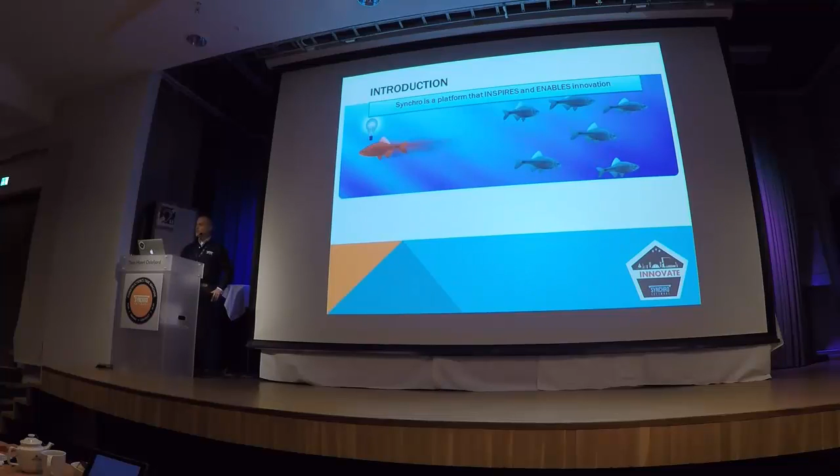And this whole background of VDC is really a core of what I'm going to talk about. When we get to innovation, Synchro inspires innovation, but more often than not, somebody needs to show how it's done. And that's just the nature of introducing something new.

So back in 2014, we essentially asked ourselves, why don't we do this ourselves? It seems like kind of an obvious thing that a software company should help customers implement the software, enable innovation. But I would argue that our company is unique, and that there literally is not another software company that does it the way we do it, to the degree of commitment that we have in extending the value of our software in the hands of our customers in the most powerful way possible.

So the question is, how do you build the capability once you decide you're going to do this? It really comes down to two essential steps. One is develop a VDC-based strategy. That's the core foundation of how you're going to go about doing what you do. And hire people who are not only experts in Synchro, but who understand what VDC is all about.

When you think about it, the earlier presentation talked on these topics, but I would venture to say that a lot of people that think about BIM, think about VDC, don't really appreciate the connection to 4D as thoroughly as they should. 4D is all about the virtualization of the process from design to construction.

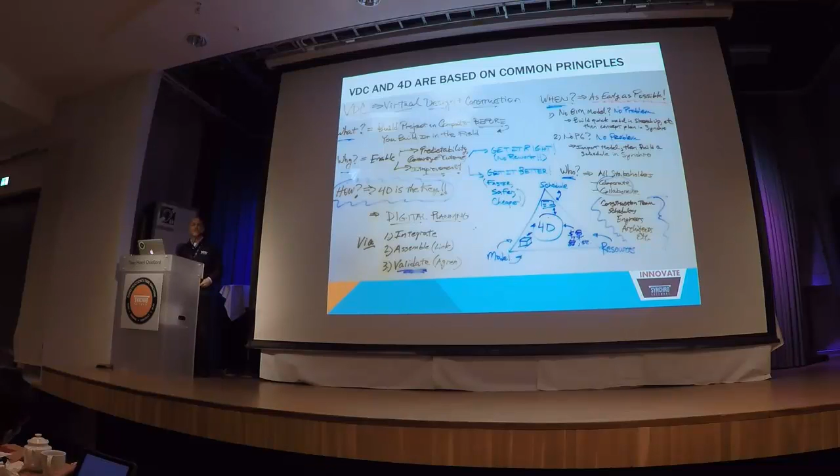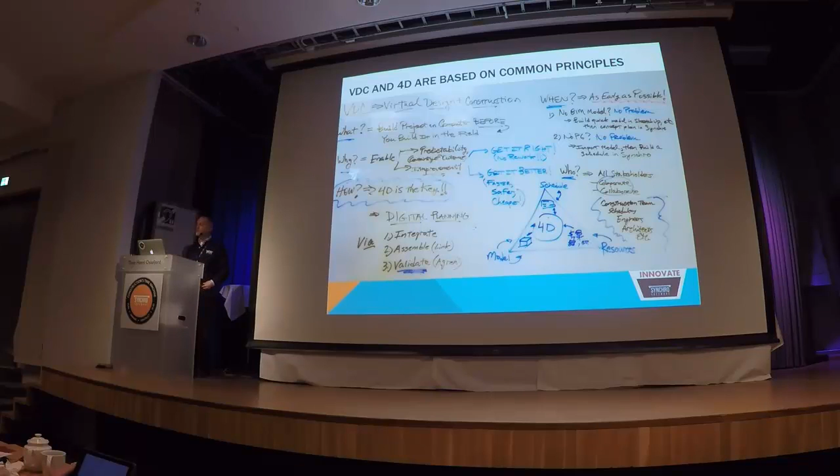It's not just that we enable innovation with using the software, it's enabling innovation through the entire ecosystem of people that are involved in the project.

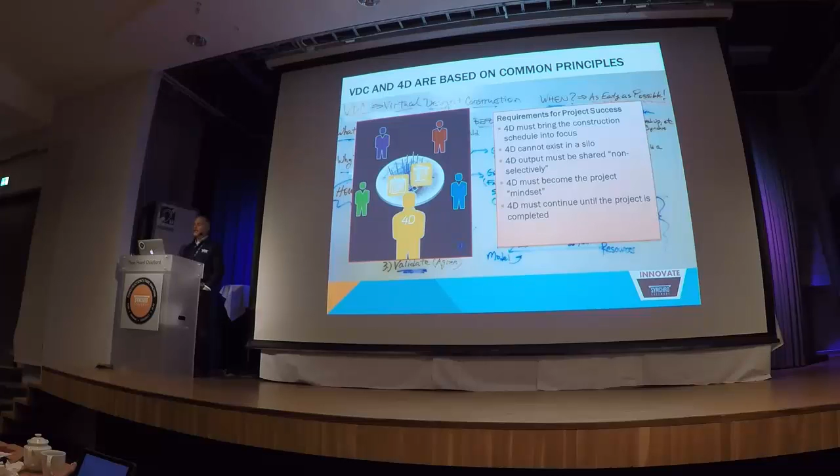And I believe that there are basic requirements for project success that have to be delivered by 4D. It must bring construction schedule into focus. If it doesn't, you failed. It cannot exist in a silo. If it does, you failed. The output must be shared, what I call non-selectively. It must be democratized amongst all the people that need to consume it. If it's not, you failed.

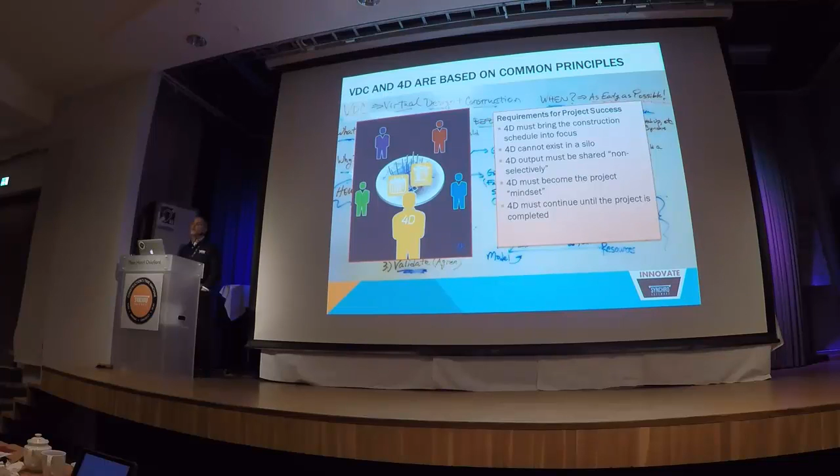It must become a mindset for the project. It's not just a side job of somebody else to crank out a 4D animation. It needs to be the mindset of the project. If it's not, it's going to fail. And it must continue until the project is completed. If it doesn't, you may not fail, but you certainly won't succeed as much as you could have.

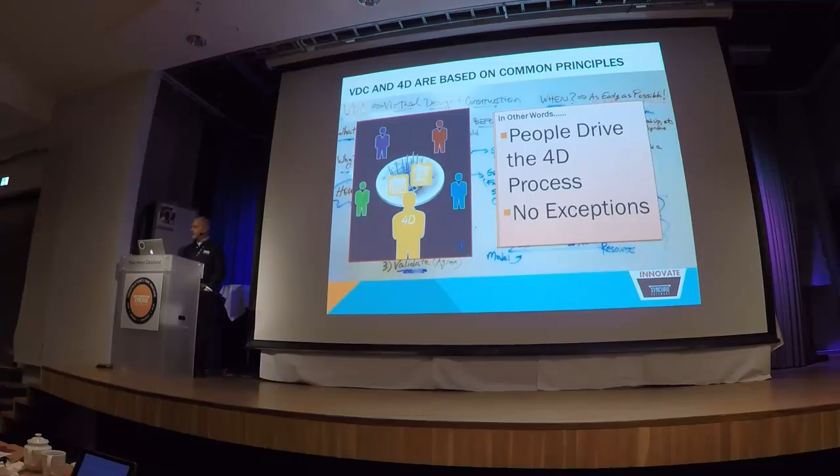Or in other words, people drive the 4D process. There are no exceptions. Technology, this isn't technology. 4D is about people.

So a lot of our customers use the software at the beginning of the project, and that's how probably a lot of your companies do. You link a schedule and a model, you create a 4D animation, and it looks really cool. Everybody kind of has a good feeling about the project. But generally, people have a good feeling about projects at the beginning anyway. They always think they're going to come on, they're going to be finished on schedule and on budget. And I would argue that a schedule is never right.

So as we move through the life cycle of implementation, we are seeing our customers innovate in fantastic ways that have to do with integrating resources, such as quantities and cost, into their 4D environment, enabling better and better constructability reviews that we saw some photographs of earlier. Actually getting into analytical exercises of evaluating risk and evaluating safety, evaluating the digital environment and using it to help virtualize the installation of complex construction sequences before they even get out in the field.

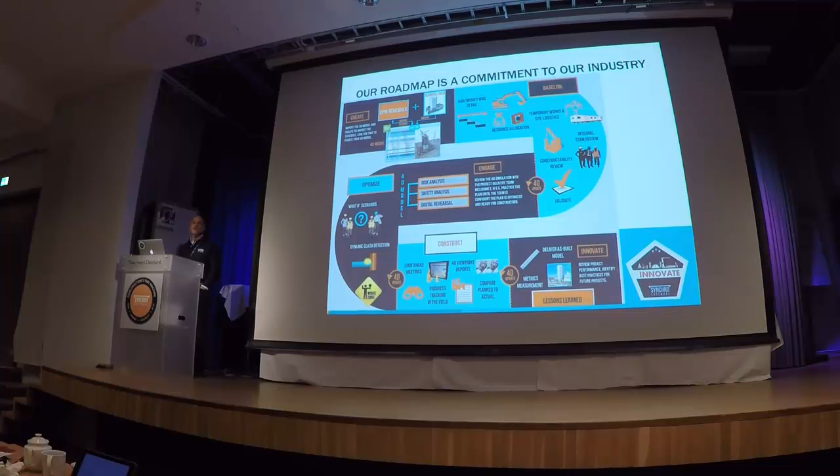I mean, why not do this? It makes total sense. And why not go into optimization? Why not use this tool instead of just feeling good about your schedule? Why not improve it? And then getting into the construction environment, utilizing the delivery mechanisms such as tablets and HoloLenses, but basically getting that data to the field and getting it back from the field to the planners so that everybody is participating. And this roadmap is not just our software company's vision, this is our commitment to the industry. If the industry fails to do this, we have failed as a software company.

So after doing this for about a year, I would distill sort of in a nutshell maybe 4 bullets as to really, from a Synchro perspective, how do people drive innovation? What does it take? It's not an exhaustive list. But I would say expertise, number 1. But there is no 2, 3, and 4, they're all equal. I would say it's expertise, continuous focus, diversified perspective, and I'm happy to hear that there are a lot of engineers in this audience, construction people, there may be a few planners, I know there are in the front row.

This diversified perspective is so empowering. And ultimately it comes down to teamwork, which actually in construction is one of its strong suits from my experience. There is a good sense of teamwork. So if you do the first 3 and you deliver them something they can work with, the teamwork will be taken care of. But of course there's always this challenge of finding people that have a passion for this and can do it—not only can use the software, but can face the obstacles that it's going to take to introduce something new.

So I would like to introduce you to our team in its current state, because everything I'm going to talk about from here on is not my work. It's going to be the work of people here.

This is Amir. Amir works in California. This is Jacqueline. Jacqueline works in California. This is Maria. Maria is here today, she works in London. This is Mazen. Mazen works in California. This is Shawa. He works in Southern California. We're all otherwise in Northern California. This is Pavel. Pavel's here today, he works in England. And this is Stanley. Stanley works in England. So these are the people that are working with you and working with our customers to help them

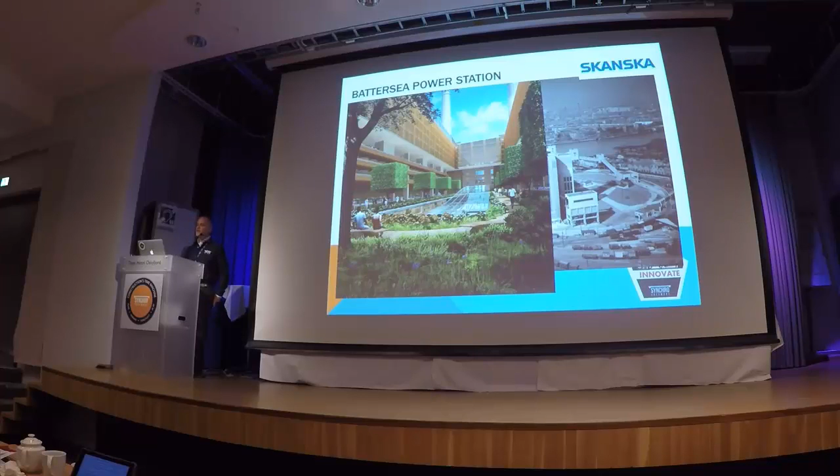So the first project is the Skanska project—Skanska UK. And it's the Battersea Power Station project, which is a landmark. This is a famous place, one of the original power plants in the world that's been decommissioned for a long time. And the City of London is going to convert this into a fabulous development that's for retail, park space, office space, residential space, conference space. And it's going to look something like this in the inside of the boiler house, which is going to be amazing. It's a very challenging project, not only huge, but the local infrastructure creates a lot of challenges.

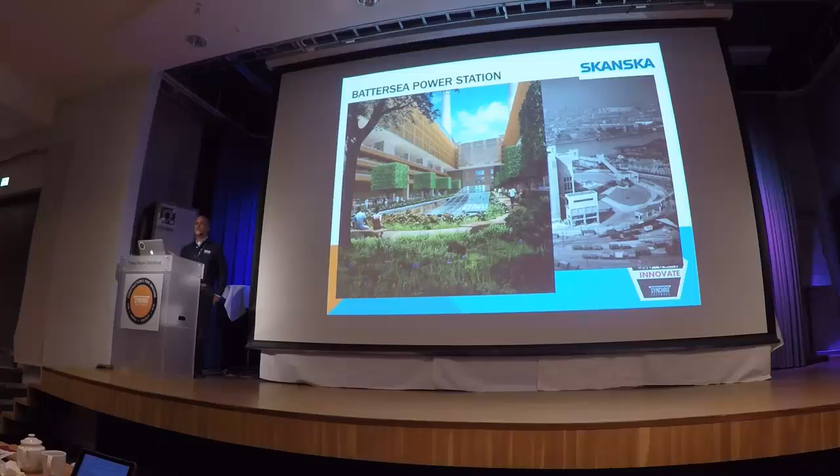And in addition, the City of London is focusing on maintaining as much of the original material in this structure as possible. So there is a lot of not only construction work, but there is renovation and I guess you'd call reclamation in this project. And there are people in the audience here from this job who will talk about it more later, so hopefully I'm giving a reasonably accurate assessment.

This is just an aerial view of one stage of the construction. As you can see, it is massive. There are cranes all over the place. There is very little access roadway, and there are 2 major projects on either side of this project, and they are major, huge. This project is a logistical nightmare. So Skanska is using Synchro for this job, and one of the main goals is to help manage logistical challenges of this project.

In order to do that, they've asked one of our people, in this case Maria, who is providing focused attention to this project by literally being there and executing the use of Synchro and bringing everybody together in terms of participating. I'm going to show an example of a couple forms of the output that it creates.

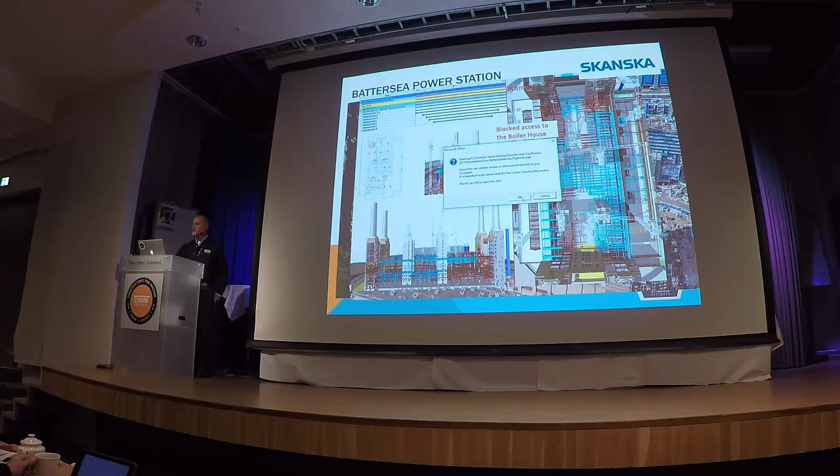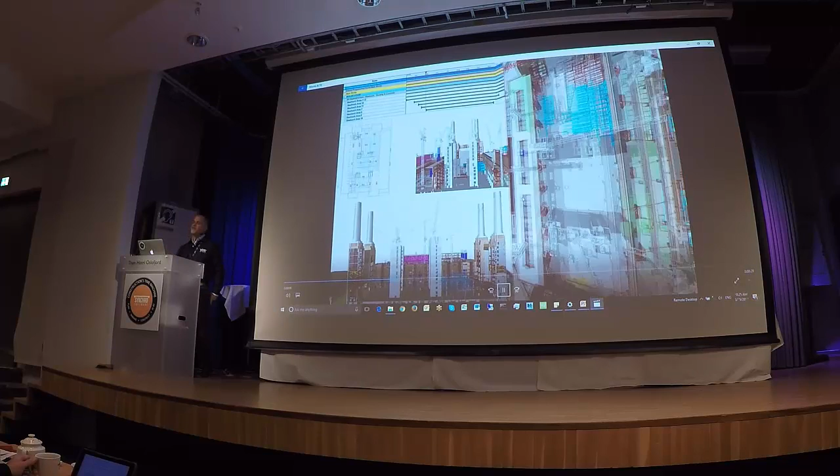A lot of users of Synchro, we've shown animations, everybody loves animations, but a lot of users, in my experience, love PDF output. They can get the data they need on, let's just say, a sheet of paper or an electronic sheet of paper, and organize it the way they want, and then share the information with everybody on the team, cycling through a time sequence, which in this case is a steel construction sequence occurring over weeks.

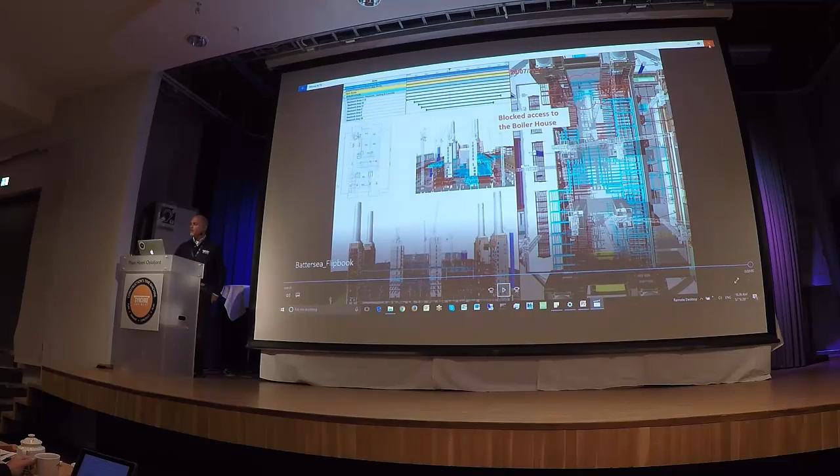By doing this, you learn a few things. In this project, they've frequently learned that there are schedule errors. An example is this one here, where a scheduled activity to install some steel structure is going to block access to all the other work going on in the boiler house. Much better to find that out early, before you actually do the work. That's just an example of PDF output being used for that.

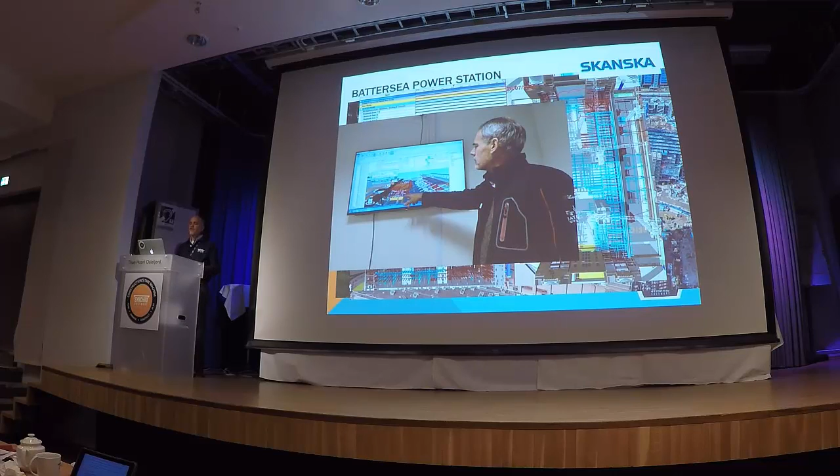There's participation — this is just one guy, I'm sure you'll hear more about him, the project's name is Peter, I think. Basically, it becomes organic. The model is on the monitor, the people in the room are making decisions. When they make decisions, they're not flipping through papers as much as they're going to the model and asking, what can we do about this, or what is this? You get the idea. The production of output is phenomenal on this job, thanks to Maria and Synchro software.

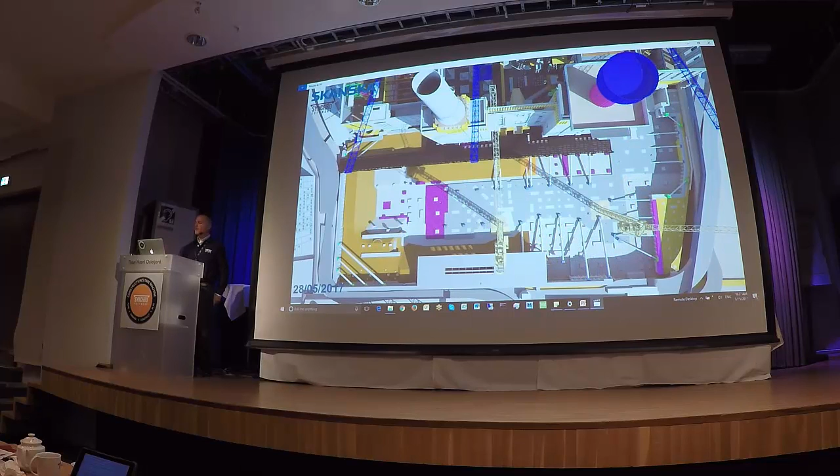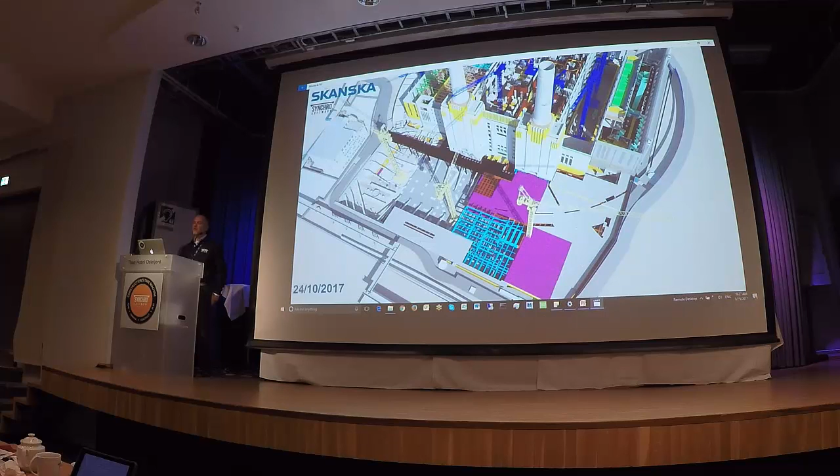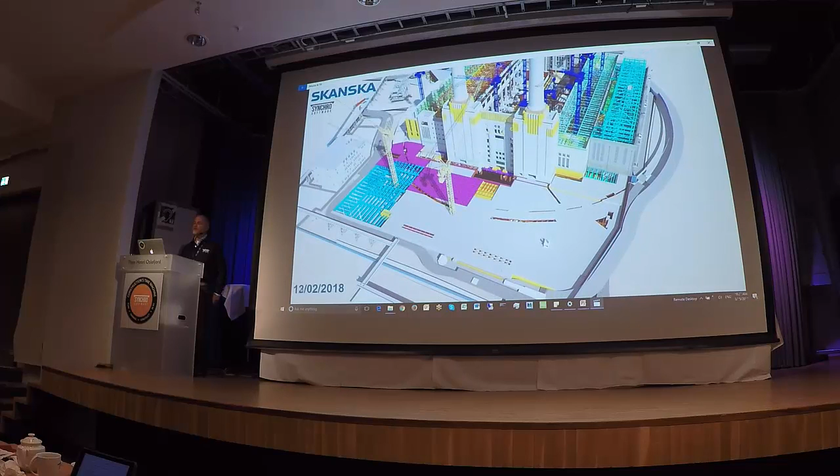I want to share a little anecdotal story, since it comes from Stanford again. I was giving a presentation to a VDC class at Stanford, a graduate class, because they're doing a couple case studies with Synchro, and I'm personally helping them with it. I showed this model, and one of the students in the class said, well, how many people does it take to do this process and keep it going through the project? And I answered by saying, well, how many do you think?

In the meantime, I was looking for a photograph, and the chatter in the classroom came up with an answer of, say, between 5 and 10 people to do this. I finally found my photograph of Maria — if you haven't met her, you should meet her. And I said, Maria does this 3 days a week with Skanska. So the answer to the question is 60% of Maria.

It's not just a point about Maria's skill — it also highlights and illuminates the power of this software. People don't realize how much can be done with this software until they start to really do it. It's literally overwhelming at first, and then when they start doing it, it's amazing.

I want to talk about another large project. If you've been to LAX Airport — I think it's the 4th busiest airport in the world, certainly one of the biggest — they are building a new airport terminal. It's a multi-billion-dollar project, and the contractors there are Turner and PCL, in a joint venture.

This is a project with what I would call a high-caliber BIM process. This project has a fantastic BIM execution plan. They have a team put together that is made up of experienced VDC specialists and leaders in BIM, and they have schedulers that appreciate the value of BIM and 4D. What they also have is a 4D scheduler — that 4D scheduler happens to come from Synchro, and he's assigned there for a year, and that was Shawa. I'll show the picture of Shawa.

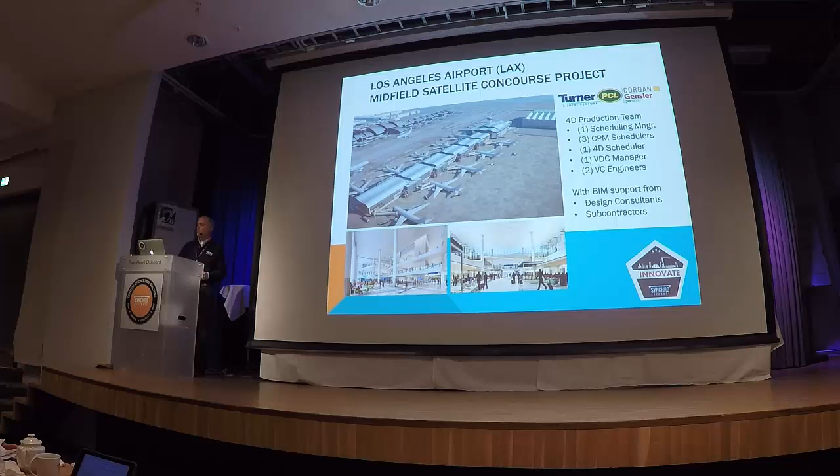I want to bring up the point of what's called the 4D scheduler, or the 4D planner. There really isn't a name for it, in fact maybe it's just the Synchro expert. But whoever it is, if that person is dedicated, the power and the value that comes to the team is so organic that it almost seems like it's not even about the software anymore. This project has an interesting outlook, and I think it's something other projects will start doing.

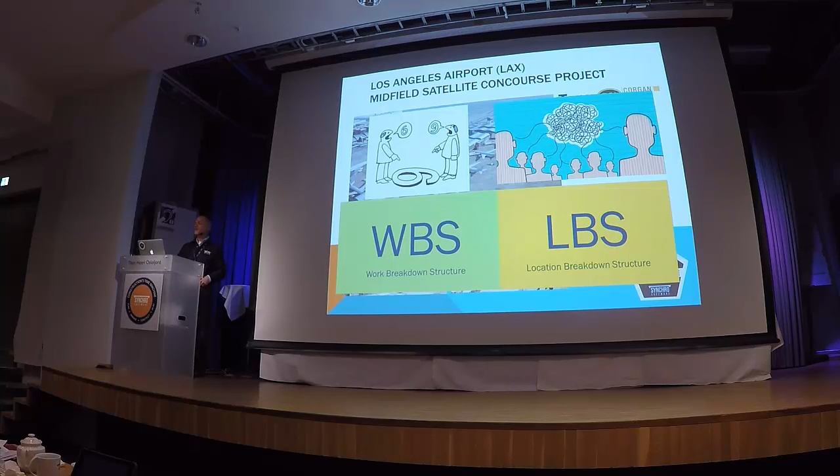Not only do they have a work breakdown structure in the schedule, but they've developed what they call a location breakdown structure. This is a nice enabler for Synchro, because now we think in terms of workspace, not only activity code, and we can organize planning based on workspace. This wasn't something we came up with - it's something Turner PCL developed for this project, and it's creating a lot of value.

This is their basic workflow. It's not that unusual, but if you're new to Synchro, here's how it works: they take data from primarily Revit, Civil 3D, and different models from fabricators and contractors. They federate it all in Navisworks to do design reviews and model federation, and then import into Synchro from Navisworks using our plugin.

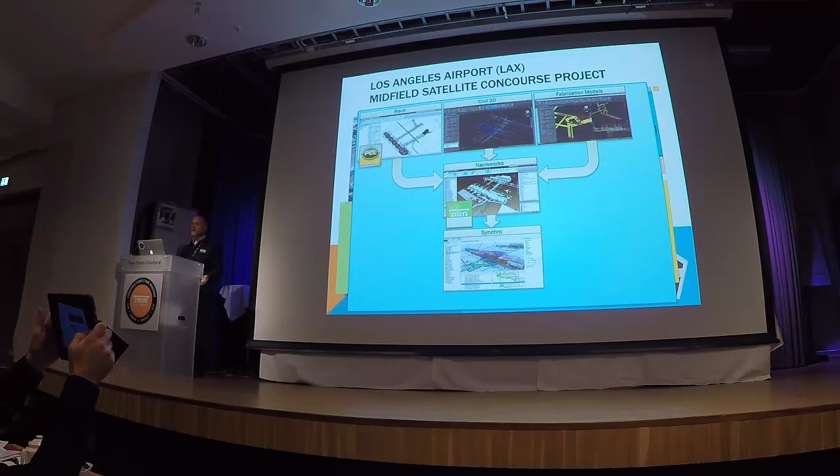Speaking of plugins, you're all probably familiar with ours. I want to plug this little tool by PCL - I don't have any affiliation with them, they're a great contractor. They developed a tool called PCL Parts Lab that does fantastic subdivision work in Revit in preparation for construction level planning. Check it out.

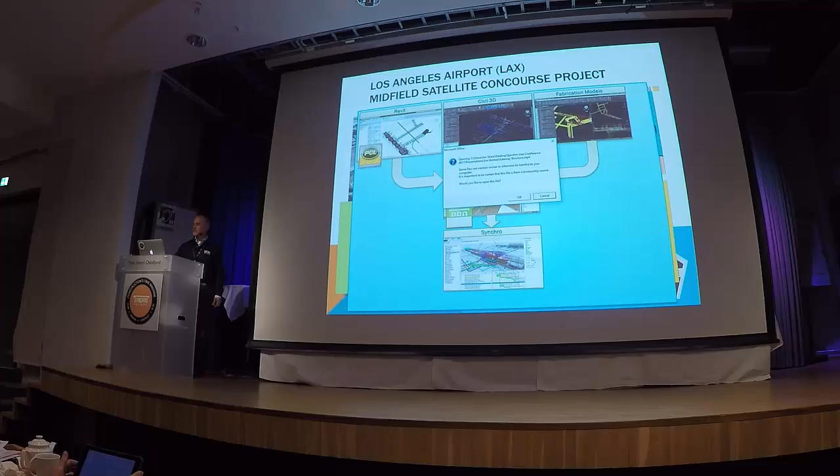This project is at the beginning stages. Again, this is a massive model - they have a model of the existing terminal, and a Revit model of the entire new terminal. They're using these models to visualize upcoming work, and as you'll see in my next few slides in terms of work process, we'll show a bit of the model.

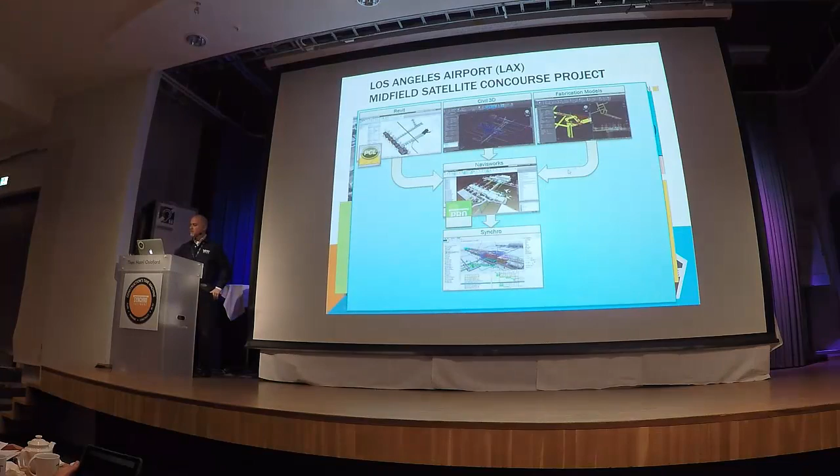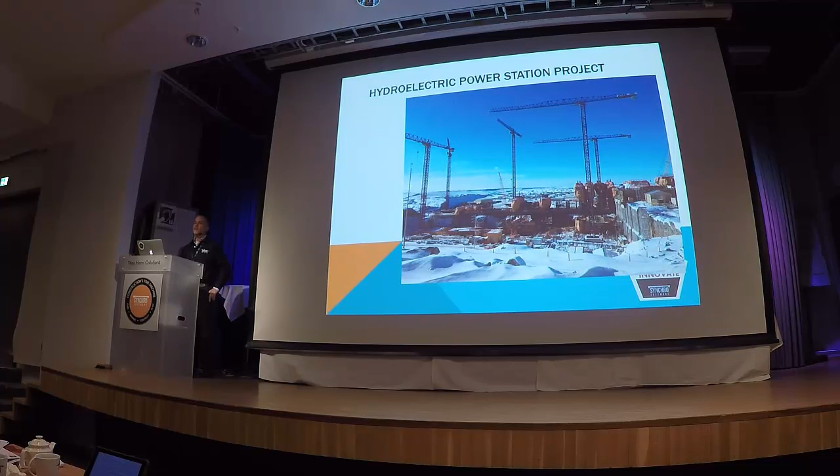One more example - we're going to move into the industrial infrastructure realm. I want to talk about a hydroelectric power station called the Keeyask Project, located in northern Canada, almost at the North Pole. It's a massive project that's been going on, and they're going through a rebaselining effort right now, over the last few months. That effort has turned to Synchro to help get this project back on track. They've asked our group for help, particularly Amir, who I alluded to, and then Jacqueline and also Mazel. This is a team effort.

This project is actually going through the process of planning in Synchro. So think about it - we may as well stop using the word 4D when we talk about Synchro, because while it is 4D, it's a scheduling tool, not a 4D visualization tool. These guys, on a multi-billion-dollar project in Canada, are planning the schedule of multiple thousands of activities in Synchro.

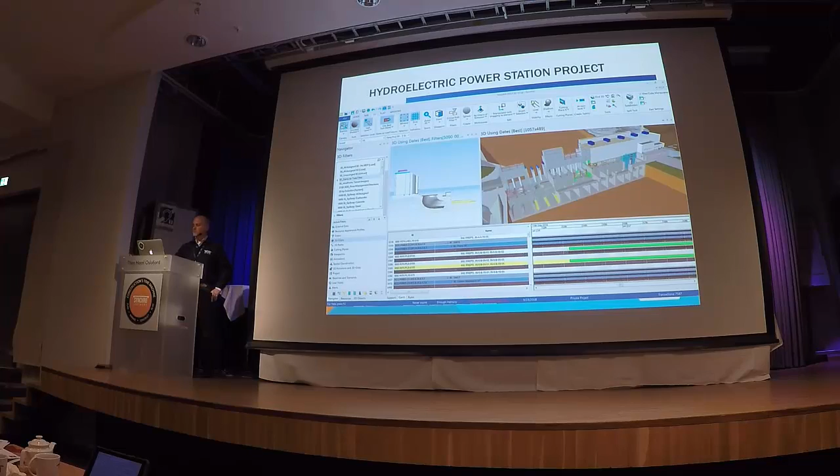Let's just show one great animation that I'm allowed to show. It's always a challenge in these kinds of situations to not inadvertently show something confidential, because it's very tempting sometimes.

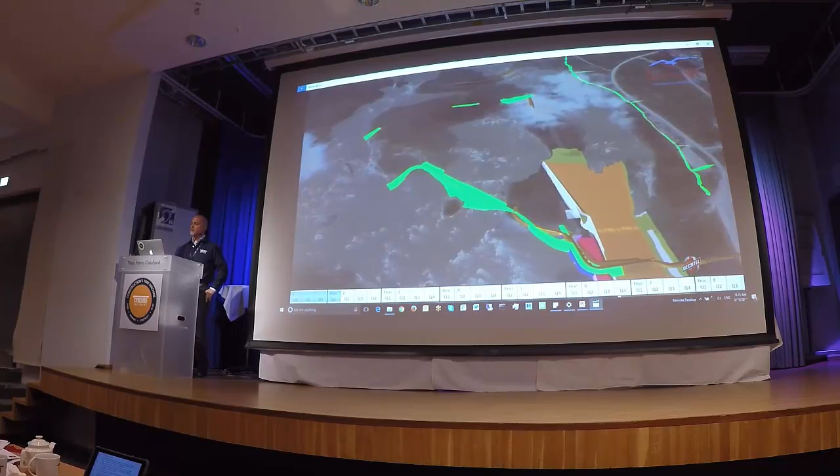For those of you working in what they call horizontal industries, not vertical industries, 4D or Synchro are used and it's very powerful. You're going to see the evolution of construction of what we call a powerhouse for this project very shortly, and you will see a lot of concrete being placed. The cost of that concrete placement is huge.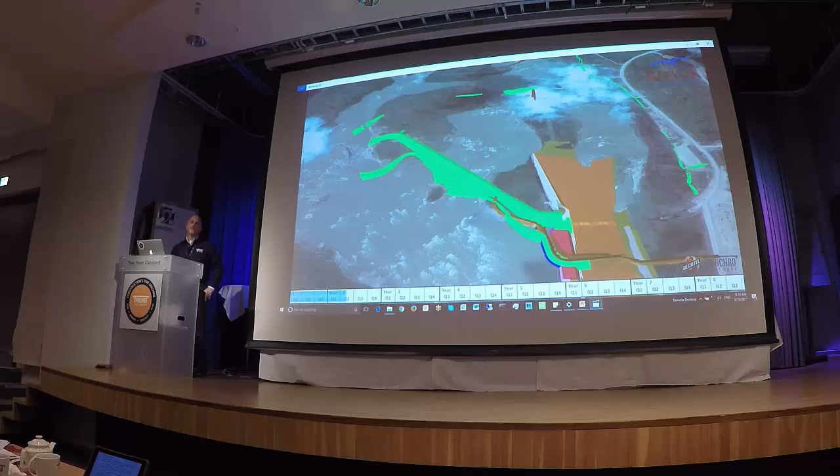Think about this too: on this project they literally can only do construction about 7 months out of the year, because the rest of the year it's really cold and not conducive to construction. So they have to organize their entire plan around that fact, and it makes things even more complicated. When this video goes dark in the background, that means nothing's going on.

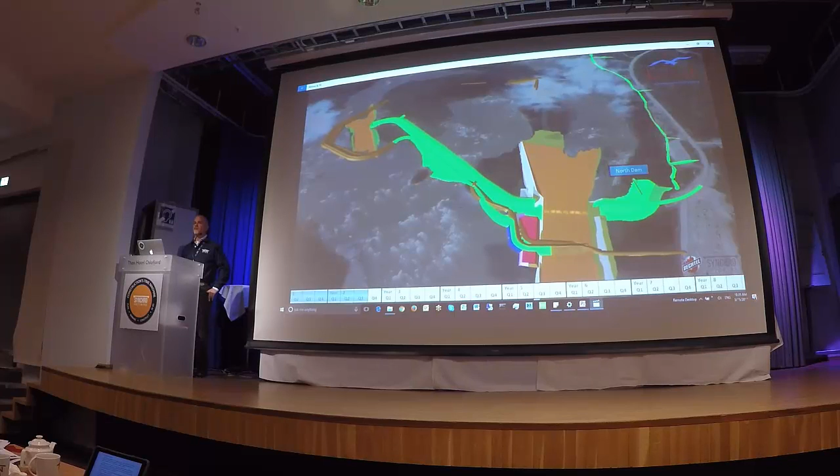Creating schedule variance.

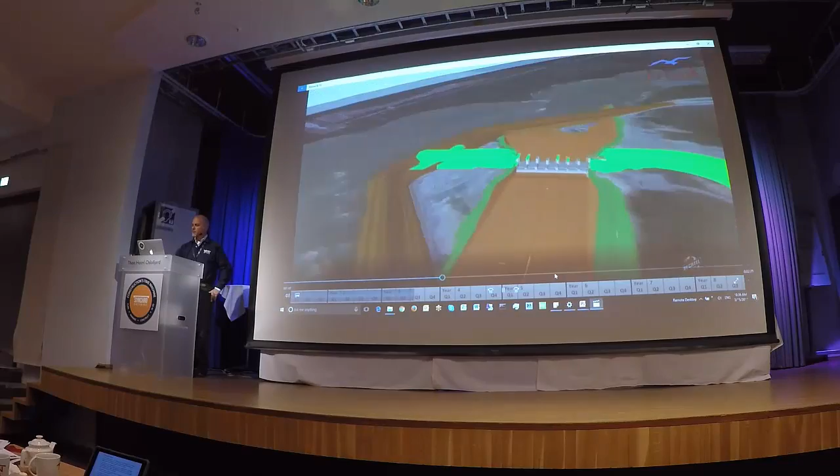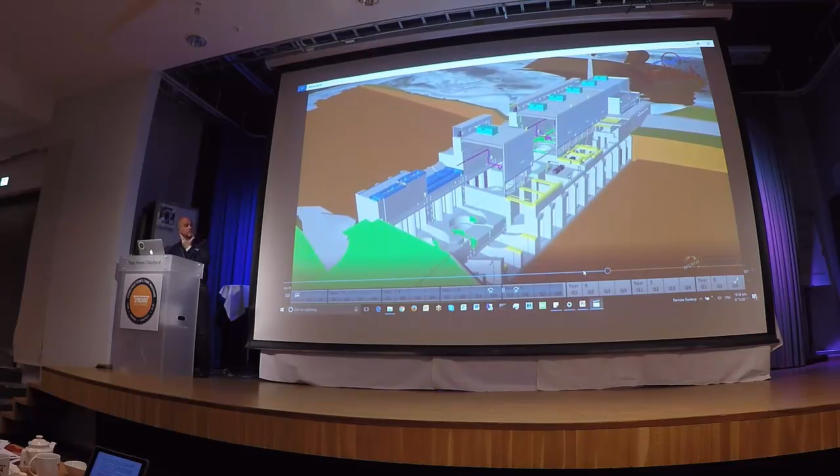By the way, the output here, this is not iTwin. It looks fantastic, so you don't have to think you have to use iTwin to get fantastic output, because you don't. You just get a different kind of fantastic output.

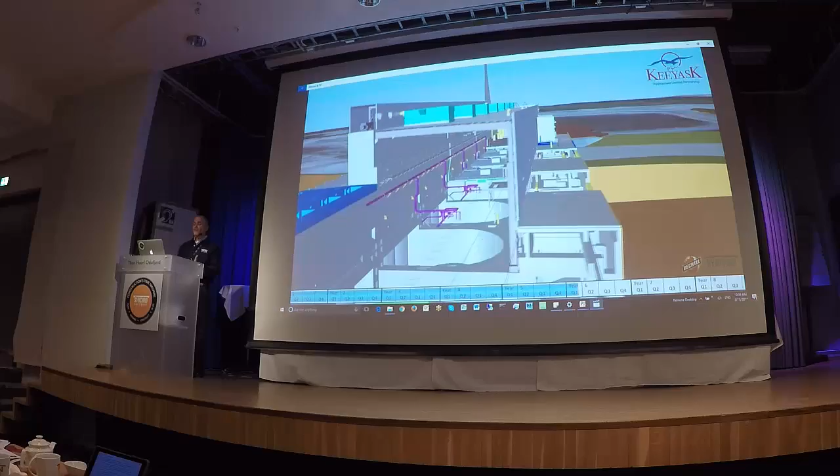These models are all coming from Bentley MicroStation primarily, so again, we work with a lot of software, and some of them are more difficult to use than others, and that should not be a barrier to diving in, and we can help with that. That's one of the things our group does, is we have experts in different types of software.

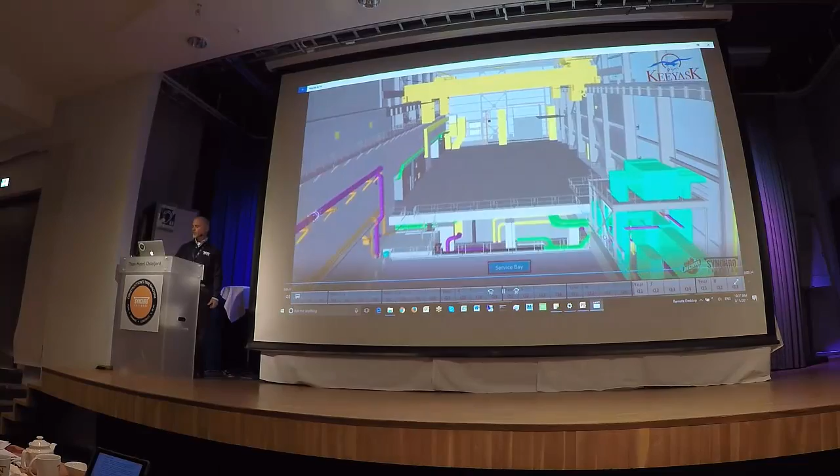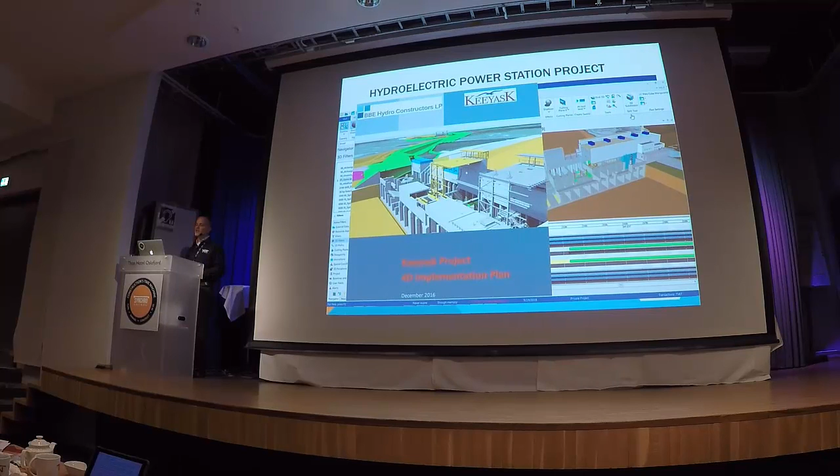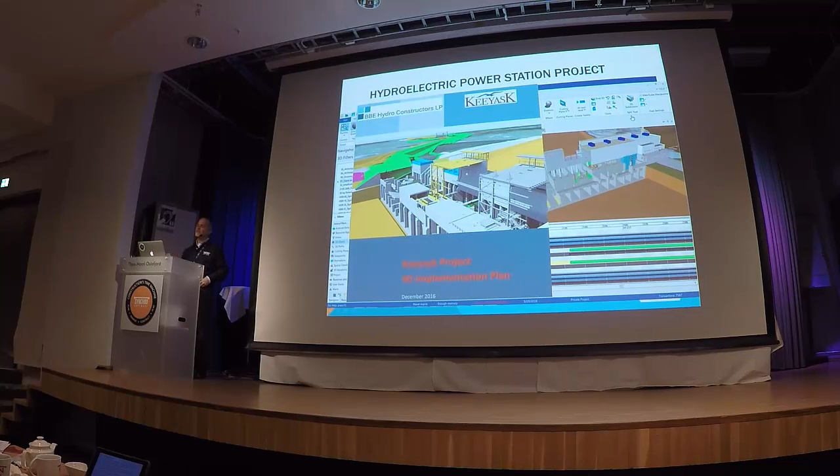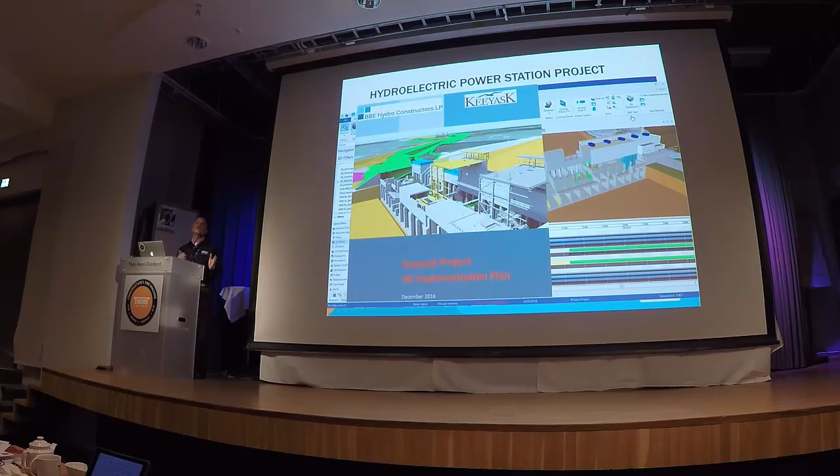But the thing about this project is actually even more interesting: this is a project where they developed what's called a 4D implementation plan, authored by BBE, a partnership between Bechtel, Barnard Construction, and EllisDon. This implementation plan for a long-term project is really a critical thing to think about, because you've all heard about BIM execution plans, but a 4D implementation plan is going to enable the team, the project, to continue effective use of the software as it works with other tools, and the people on the project through the life cycle of the project, giving them instructions on how to do it.

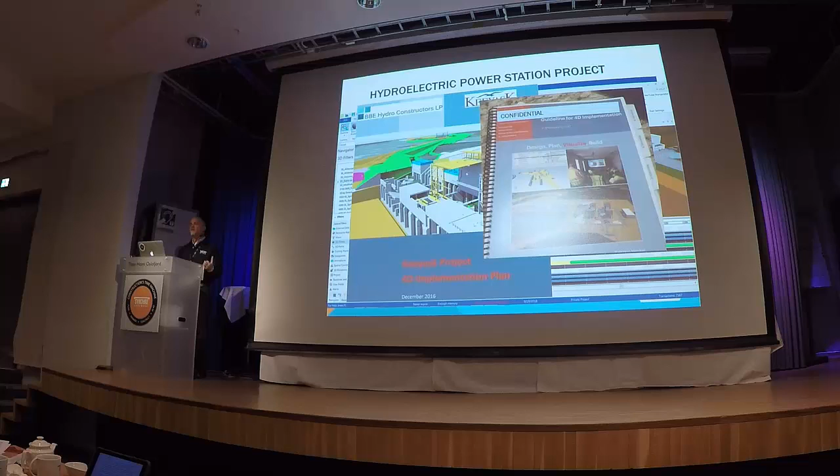And they're doing that. But even more exciting is that, from what I've seen, it's the first time a major corporation has taken what they've learned from this and begun to develop a strategy for corporate-wide adoption of 4D as a planning tool, through the development of a guide that's become what's called a procedure, meaning it's actually got some enforcement behind it. Projects in this company, when they do their planning, will look to Synchro and will have a guide to use in terms of how to go about doing this, what needs to be done to execute the job.

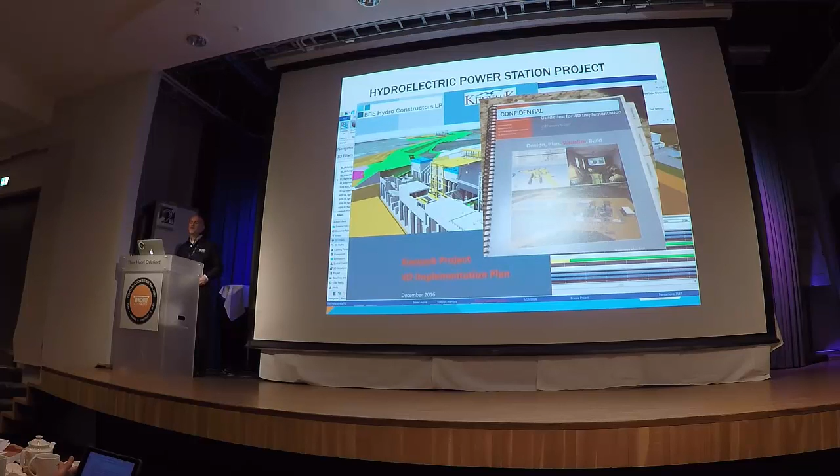This is corporate-wide adoption. So this is what I see as the future, in the very near future, a continued focus in this area.

And so what we see is, again, pictures of people. This fellow on the right, he's the project director of a multi-billion-dollar hydroelectric dam project. He's the project director, he's a senior vice president. And this woman with him, she is the chief scheduler. Now think of how good she feels standing next to the project director talking about her schedule with Synchro.

I would venture to say she feels a lot better in this scenario than she does with a stack of output from P6. So if you're a planner or involved with planners, this really makes you feel better about your job.

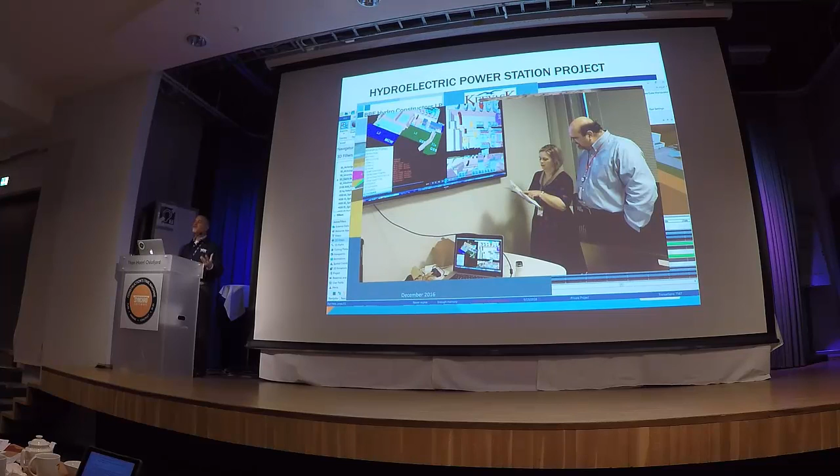So I'm hoping for 5 minutes, because Tom took my schedule variance.

And I want to talk a little bit more about not just projects, but the way we help expand the power of Synchro, not only for ourselves but our customers, through the layers of sophisticated tool sets that are currently in the software and are certainly evolving, especially in the next build that you'll hear more about. And this happens through customer engagement.

So a lot of what we hear from customers, we roll up to Greg, and he rolls it to product developers, and the nimbleness and speed at which innovation is happening in this company, I would say for sure, is exceeding virtually all companies I've ever seen in terms of actually taking what customers want and need and getting it into the software.

And a lot of that comes through really kicking the tires, and that's part of what our team's job is to do. So I want to talk first about what I would call a soft innovation, because in many ways this should not be an innovation, but it is.

It's beyond me why people that work in pull planning do not use 4D as part of pull planning. Why would you not want to visualize what you've just done with all those sticky notes? So if you look at the left side of the screen, the sticky notes are on the board. It's part of the process, but they're not looking at them anymore. They're looking at what the 4D model is showing based on the decisions they've made for the pull planning process.

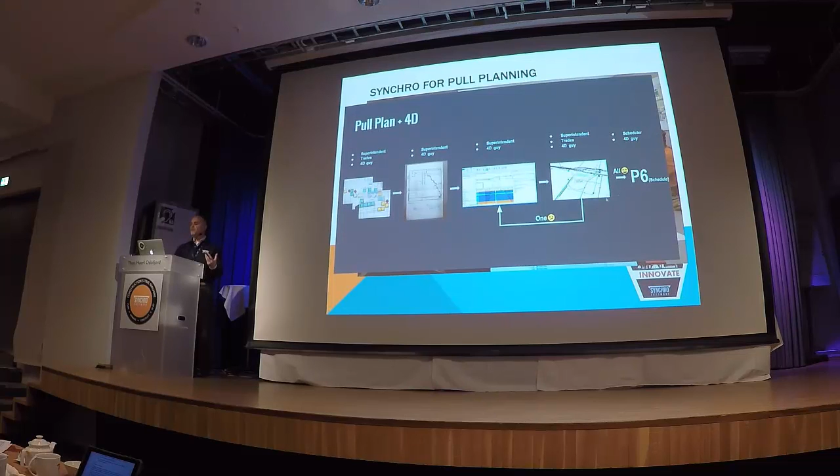Remember, he's only been there for 2 to 3 months. The next stage is to plan in Synchro. So instead of handing the schedule back, let's start working in this environment and get it better and better as everybody participates. That will happen next.

This is Shawa. He's now working with the guys in the field. They're paying attention, they're not out in the field, they're paying attention.

I want to talk about safety. Everybody talks about safety. At Bechtel, safety was the most important thing, right? A lot of contractors say safety is the most important thing, but who the hell measures it? And the thing is, what are we doing early in the stages of a project to make it better? Construction companies do a lot at the job site to make it better, but I would venture to say they do relatively little at the beginning to make it better.

In this project in Texas, this is a Bechtel project, a liquefied natural gas plant, but the focal point of the implementation of 4D is on the construction of what's called an LNG tank. And you would think an LNG tank is not that complex a project. It costs $1 billion to build an LNG tank. It's incredible.

These guys, we've talked about Synchro, we've shown this image, they are participating, they are using it, they are sharing in it. They are also doing some more innovation, which is integrating drone data with a 4D model, with the Synchro model, and using that information to help improve their planning. This is happening on the job.

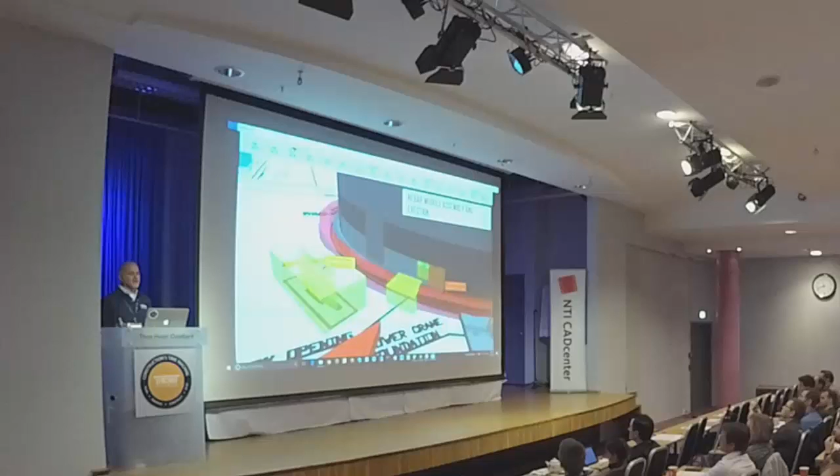And they also are doing creation of videos. The videos are based on the schedule, but the focus of the videos is to train the workers and inform them of risks and hazards that they could be confronting out in the field before they get out in the field. By using the 4D, you can take advantage of the time element as it plays a role in this process. And you can also take advantage of the tool sets in Synchro that enable great analysis of workspace, great analysis of 3D paths, great analysis of tool sets that help provide not just schedule, but also associated information.

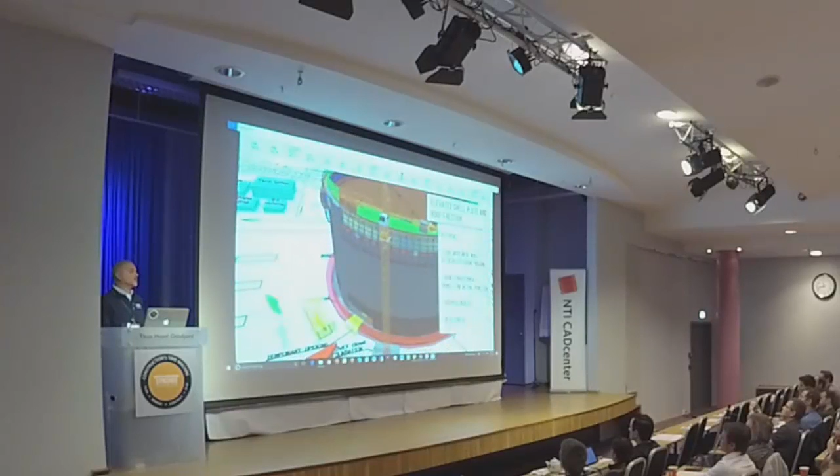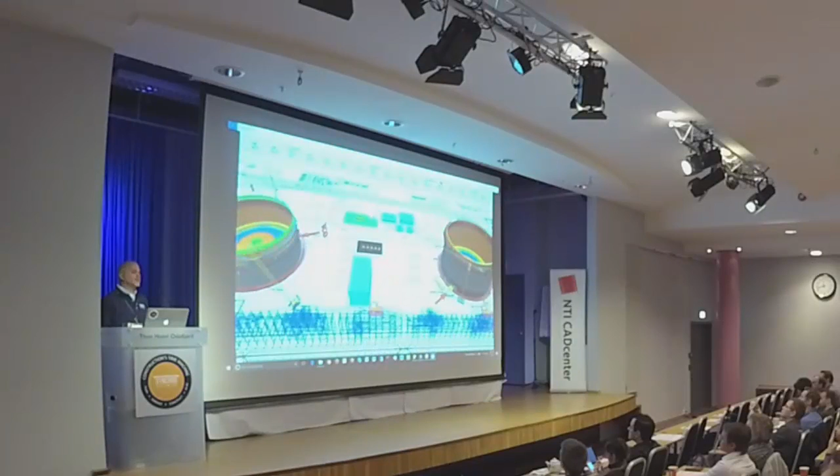And this model is very complex. There is rebar in this model. You're looking at projected crane overlapping scenarios that you need to be aware of. They're going to make about 20 of these videos. This is just the first one. So these guys are committed to making videos to help plan safety on this project.

And this is just a quote from the construction manager. You can read it. It's all about risk. On these kind of projects, it's all about avoiding risk.

This next one is a powerful example, though I'm running short on time. It's an example of the power of what we call calculated user fields, and the power of thinking about Synchro now. It's not 4D anymore, we're getting into resource management, what a lot of people would refer to as 5D. But how can you do 5D without 4D? If you don't have a schedule, how is it meaningful?

What we're using here is a tool set called Synchro Script. We've created a parameter that will align the quantities of the volumes of concrete coming in from the BIM model. The BIM model provides this metadata, and Synchro absorbs it. Now we can use that BIM data to organize calculated volumes, and assign them as planning units using calculated user fields. The result is I can now see my schedule in terms of volumetric pour of concrete per month per task. There is no other program that can do this, and we can show you how.

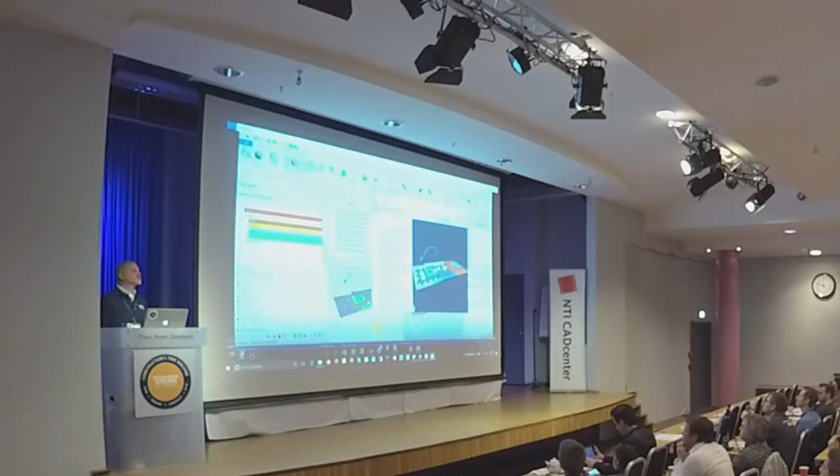For this one, I think I have it done with audio. In this video, we're going to look at how you can use the mobile application to accurately track the statuses of your resources and tasks, and get a clear understanding of your ongoing construction project.

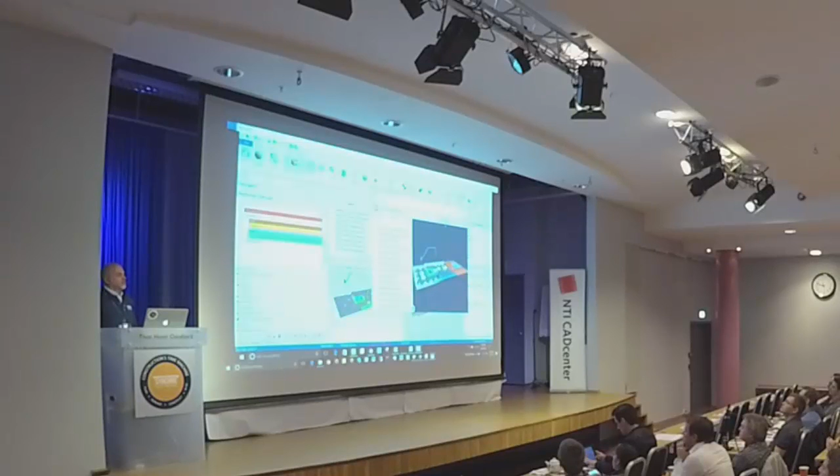In this window, I have Synchro Pro open with the Gantt chart on top and two 3D views. On the right, the 3D view shows how the project is going to be built. As I move the focus time, we can get an idea of the sequencing of the work. On the left, we have the resource status colors view, showing colors according to the status of each resource—for example, form, reinforced, place, and strip for concrete statuses.

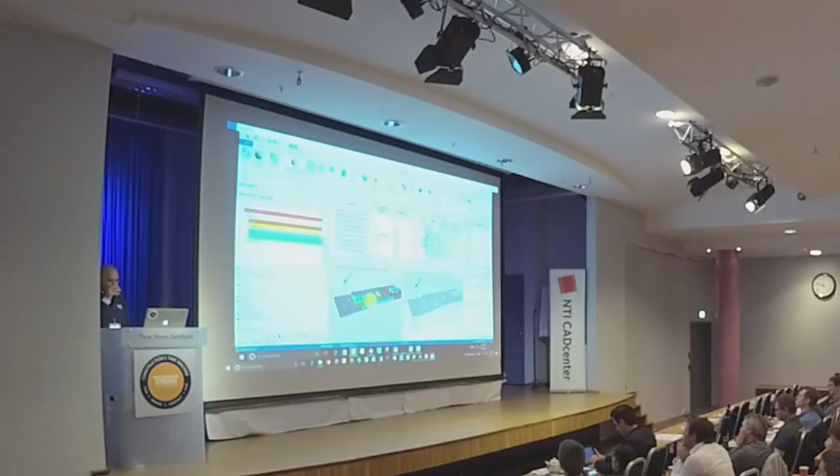If I look at the model, I can quickly tell the status of each resource, or I can click on, for example, this shear wall, and know that it was reinforced on the 28th and stripped on the 30th by looking at the status history.

Now we've also created some custom user fields, for example, for percent complete for each resource, and these are according to a rule of credit formula.

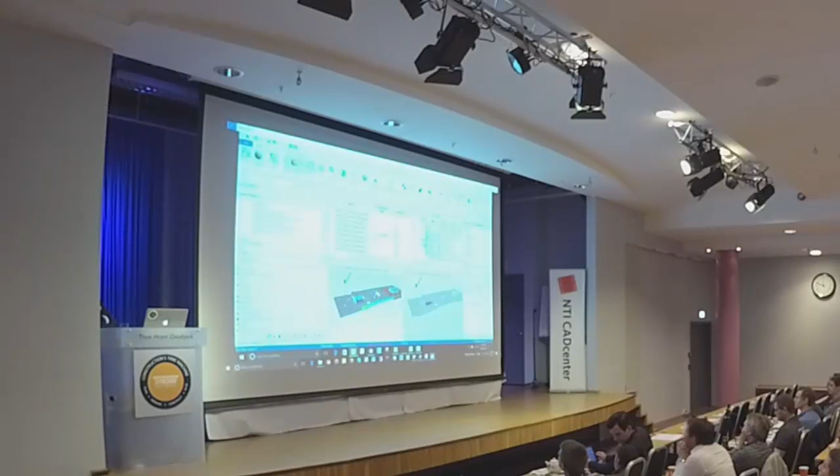So if we go to user fields and check the formula for percent complete resource, it says that when the status is set to concrete form, it will assume it's at 25%, reinforce is at 50%, place is at 75%, and strip is at 100%.

And then we also have some task user fields, for example, percent complete for the task, which does a weighted average of the percent complete for the resources when it's an FRPS task. And when the activities are separated, like reinforce, pour, and strip, then we'll make use of additional user fields such as is formed, is reinforced, or is placed to do a weighted average for those as well.

And then we have some model quantities like the concrete volume, the poured volume, which for place activities is the percent complete times the volume, and then the cubic yards per day.

Now let's look at the mobile application Synchro Site and see how we can status resources from there. So this is the iPad screen being shown at the window here. And if we zoom in, we can either click on a task to find the resource or click on a resource directly and then choose the task.

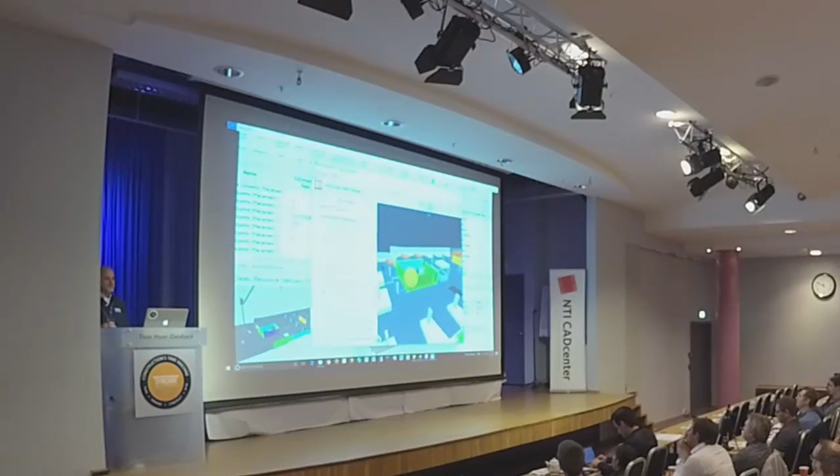Now resource statuses are independent of task statuses. We can do both in Site, but generally resource statuses is done in Site and then task statuses are done in Synchro Pro.

So this wall is already stripped. I can go to another wall, for example, this one over here, and change the status to strip. And we'll see that there is one pending change here that will not go to Pro unless I hit the synchronize button. Let's status some more resources before doing that.

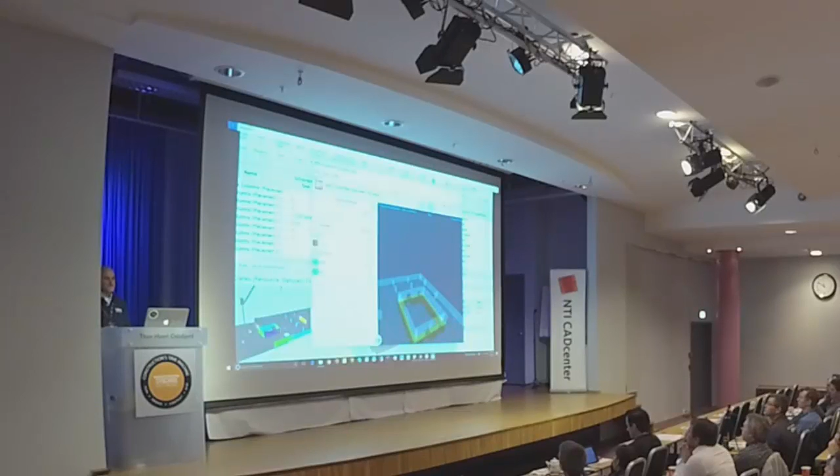If I go to the shear wall over there, I can click on that one and make it placed. And then I can go, for example, to these shear walls over here and hit edit all to select all at once and click on strip. And maybe that's enough for now.

We can look at here the pending changes. These have not yet been transferred to Pro. And I'll move the window over here so we can see what happens. Now I'm going to deselect this in Pro so we can also have a clear idea.

Now as I hit this button, the changes will go immediately to Pro, but then the iPad will try to reload the model so it's getting the latest updates from other iPads if multiple users are statusing the model. So I'll click now and you can see immediately the statuses went there.

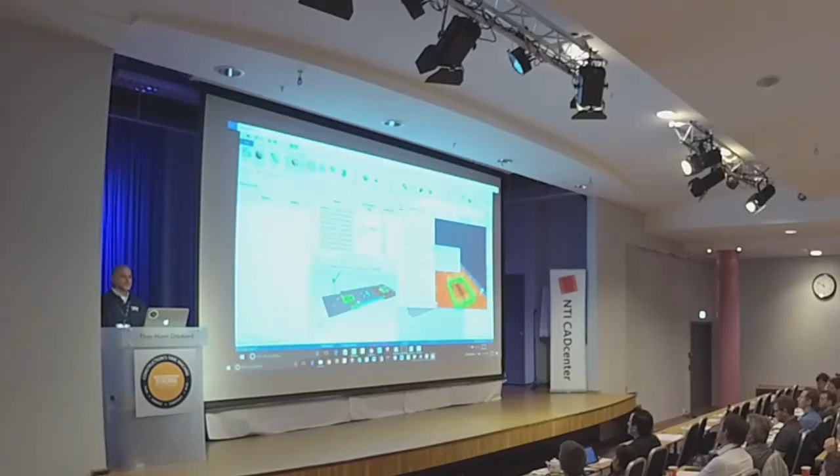Now for calculated user fields, for example here, you see that the status changed immediately, but the calculated user fields have to be recalculated. So we can go to Home, recalculate user fields, and it updates. And then we can easily export these to Excel and generate some reports.

Just go to File, Export, Microsoft Excel, and then you can do the tasks alone, and then do bar charts, or the resources, and then do VLOOKUP and use this for different accounting purposes.

So this was a great demo of Site if you've never seen it before. But the real power beyond it is that Amazon, with some clever work with the Synchro toolsets, has created an ability to track task status based on resource status.

So if I have a construction team that's simply tagging resources and changing their color, I can actually go back and have this updated schedule, which is rather amazing. Okay, so I'm basically done.

I want to conclude with a few quotes from people that are out there working with us. So sometimes I actually write these things down. 4D brings everything to the surface. The 4D guy knows everything about the project with Synchro. I know the schedule better than anyone else. I never really saw much value in 3D until I saw it in 4D.